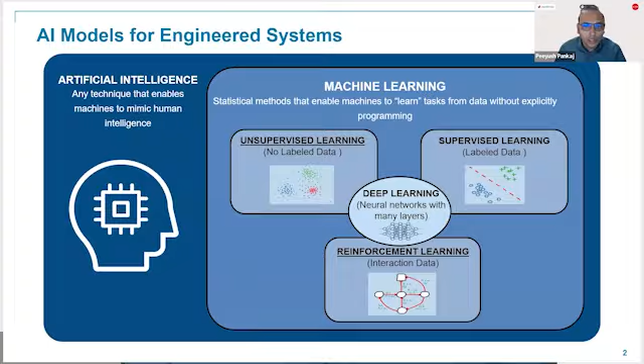So this is a general purpose AI. You could think about training different sorts of algorithms on image classification or chatbots, etc. So that is general purpose AI. Now, to your second question, Kishore, why it is gaining so much traction these days compared to maybe a decade ago. There are several reasons.

The first is nowadays we are seeing that all the heavy industrial machineries are basically attached to IoT hubs, and then basically there is a lot of data availability. There are a lot of sensors which go on to heavy machineries. So data is not a scarcity anymore these days.

Secondly, we see that there has been a lot of advancement in the semiconductor industry in terms of powering AI related chips, meaning that AI models can actually be deployed closer to the target environment itself. And also, if you talk about training these models, you have GPUs, you have HPC servers these days, so that large language models also can be trained much faster compared to traditional models as well. So that is where computational power is also an edge.

Now, at the same time, in the last decade, there have been a lot of new algorithms gaining popularity. Whether you talk about anomaly detection kind of models in the engineering sense, or semantic segmentation applications, these basically require very heavyweight AI models. And because the technology has also advanced where you can train these kind of models on your data, these three are the primary pillars of why we are seeing a lot of traction in industrial AI use cases.

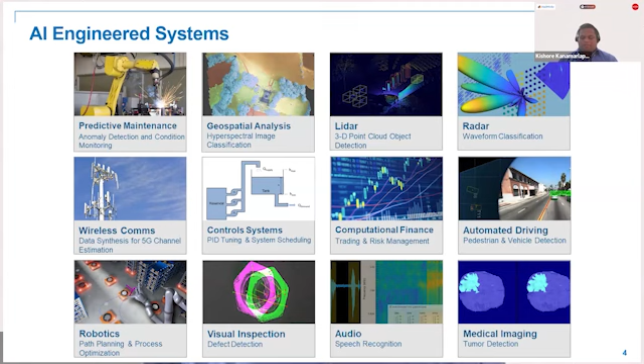Yeah, thanks, Piyush, for highlighting how the semiconductor industry has evolved over the past decade. But I want to go a little bit before in the timeline. In the late 18th century, we call it Industry 1.0, where it started with steam power and mechanization. That's the key driver. Whereas after 40, 50 years, between the late 19th century and 20th century, it is mainly shifting to electricity and also the assembly lines. That's where it resulted in the rise of mass production and standardized goods, and basically electric power started coming in. And for example, Ford also started their assembly line in the automotive industry. This is Industry 2.0.

But after that, Industry 3.0 is a little bit of a bridge, where computers started coming in the mid 20th century, and also electronics and automation started happening after Industry 2.0. When I mention automation, that's where the use of computers, PLCs like programmable logic controllers, and some IT systems came into the picture, which started the digital revolution in the factories. But now, as you said, it's more the rise of the semiconductor industry, as well as IoT and big data, which transformed Industry 3.0 to Industry 4.0.

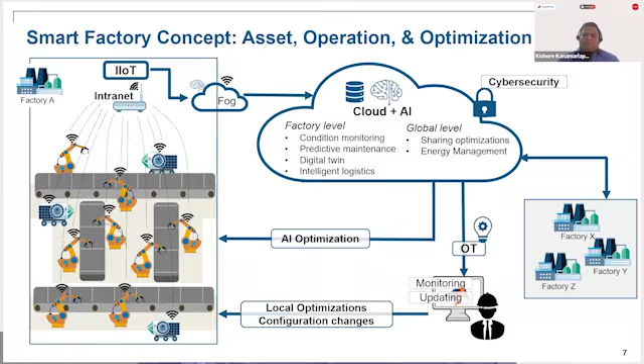So, for example, as we saw in the poll earlier, some are still exploring how AI can be deployed, right? So when we work with the customers, this slide will give you the picture of where you can start, because for each factory, each industry, it is a little bit different what kind of application suits them. So that's where we are highlighting predictive maintenance, digital twins, virtual sensors, automated visual inspection and robotics as the main use cases where they can start their smart factory journey.

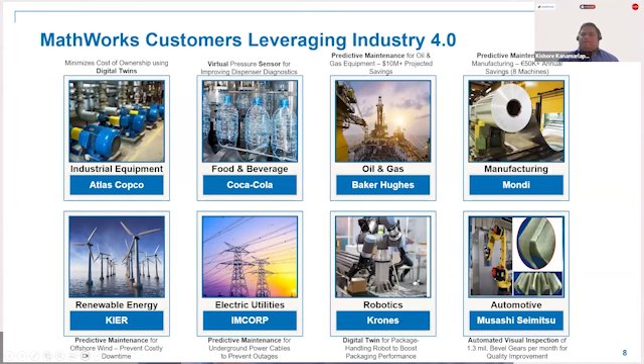And let me highlight a little bit two use cases which we have worked on with customers. For example, Mondi implemented predictive maintenance for their manufacturing process with machine learning. So when we reached out to these customers, first thing is their manufacturing line works 24/7, right? So their first question was whether your solution will run in a robust manner 24/7 or not. Then after that, whether you can reduce the waste or not, whether machine downtime can be optimized or not. Those are some of the challenges.

That's where they have used MATLAB to develop and deploy these monitoring and predictive maintenance algorithms and software. And it is able to predict the failures. With this, I think it was deployed only for 8 machines in their factory, and it resulted in about 50,000 euros per year in savings, right? If it can be scaled for other lines as well, the savings will be more. And as you know, MATLAB Simulink offers a low-code approach, by which you can reduce the development time to 6 months, and it can operate 24/7.

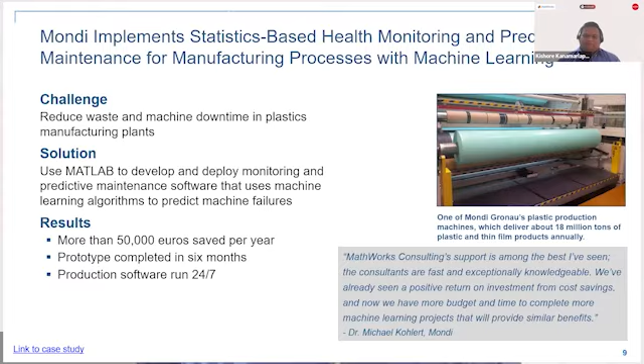And the other user story is Musashi Seimitsu, where they have used automated visual inspection. And this is where, as you mentioned, one of the deep learning techniques in AI has been used.

So their challenge was whether they can reduce the workload and cost for manually operated visual inspection for like 1.3 million automotive parts per month, which is very, very huge. And this is where Musashi Seimitsu built a camera connection setup and pre-processed the images, created a bit of custom annotation tools, and improved the model accuracy.

And as you know, MATLAB offers a wide framework to deploy the code. They have used our GPU Coder product and deployed to NVIDIA, by which they can achieve anomaly detection. And what benefits they have achieved? So as you know, these smart factories, sometimes they might not have knowledge about AI. I mean, separate departments, right? For the digital aspect. That's where we will start.

We also have that consulting arm where we work with the customers and we gather their requirements, and then we deliver their solution, and from there they can take it out. So that's where it enabled seamless development workflow from image capture to embedded GPU. And they have used CAM approach, right? Class activation mapping, to estimate and visualize the defect area part. And a simple web app can be developed using our MATLAB Simulink, by which it improved the labeling efficiency.

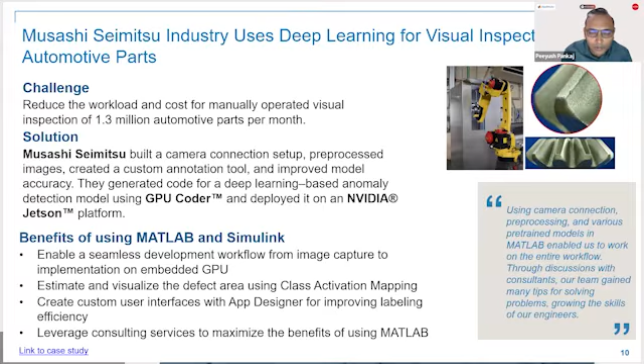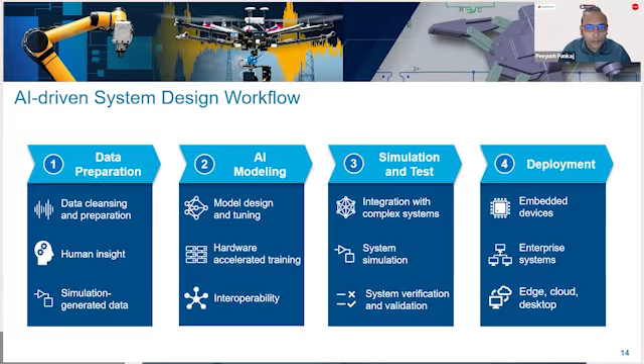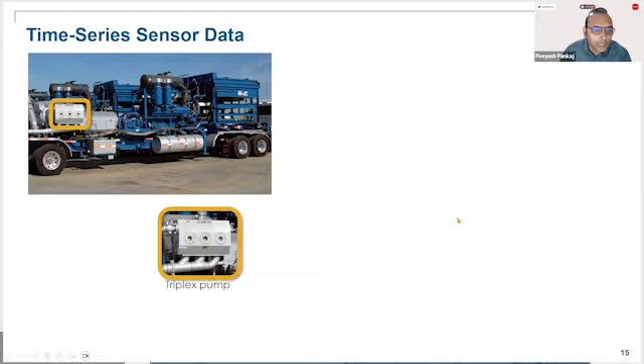Now, coming to your other question, Kishore, on what kind of data we need for this. Since you touched upon two application use cases, predictive maintenance and visual inspection, here I'm taking an example of an oil and gas rig. This is where you see a highlighted equipment called a triplex pump. You could have data collected from different sensors on this triplex pump, like temperature, flow sensor, and pressure sensor, etc. It depends upon the asset that we are monitoring.

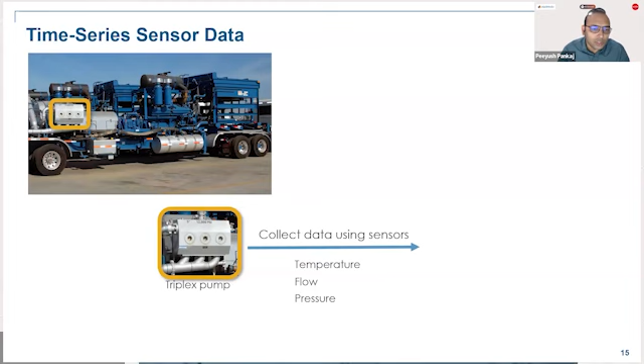So the time series data can be accumulated, and your data could come in from a healthy operating environment, as well as from when we have done some maintenance activities and knew what kind of failure happened historically. If we go back in time, we can also label the data for different kinds of failure modes.

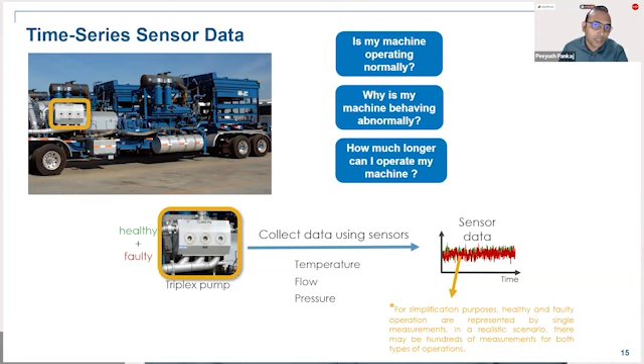Right now, when we are talking about predictive maintenance, there are three types of scenarios. The first is, we want to understand whether my asset is operating normally or abnormally. So that is typically the anomaly detection workflow for you. The second is, when you know that there is a certain anomaly, then what kind of anomaly is actually happening? What kind of failure mode is triggered?

That is condition monitoring. Then the most advanced phase is when you know that a particular failure mode has started to trigger, then how much time or how many life cycles do I have left before I hit a critical failure, right? So that is where you do remaining useful life estimation modeling as well. So this is what happens in predictive maintenance.

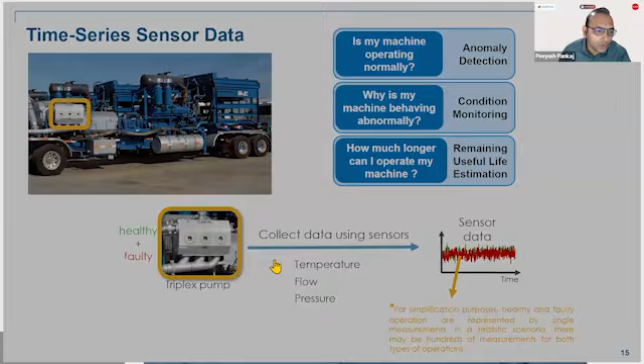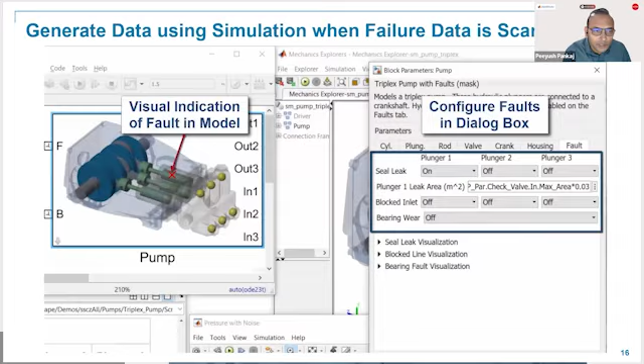Now, since we are talking about time series data over here, that is where I would like to show you a video where this is a Simulink and Simscape environment within the MathWorks toolchain. And you would see that we can create a physics-based model based on first principles modeling. And once we have the physics-based digital twin, which we have correlated with the actual data on the healthy side,

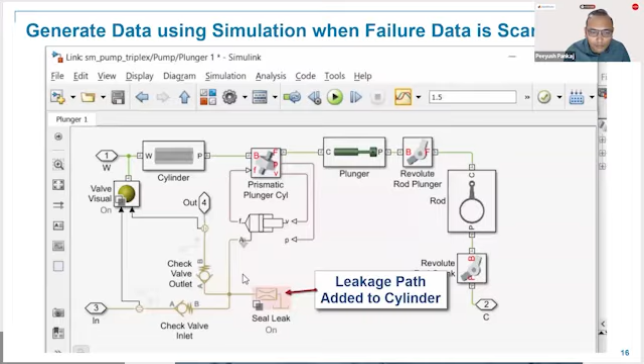you can inject different kinds of failure modes, like some valve is leaking or some cylinder is blocked, these kinds of scenarios in this context. And then you can compile the model and see whether a particular injected failure is also shown as a failure mode or not.

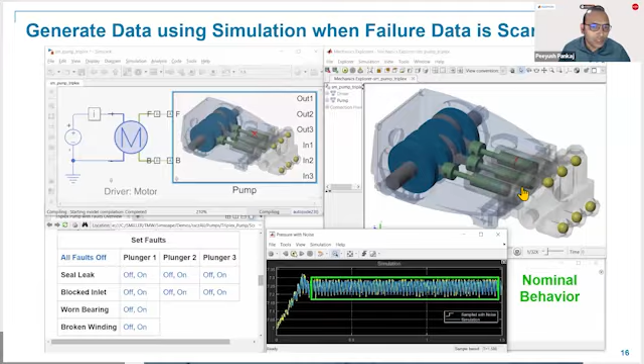Now, at the same time, this is where you see when the asset was actually operating normally, this is the green threshold region, the bounded box that you see, where the normal behavior data was actually recorded. And this data is also correlated with the healthy operational data, because after working with so many customers, we have realized that healthy operational data is the easiest to get, and that is where you can correlate your physics-based digital twin.

Now, once you have correlated your physics-based digital twin, and then you inject different types of failure modes in the model, and then you start synthetically generating the data, you would see that for different failure modes, the data will certainly not be in a normal operating range. So this is just to show you that when there is a scarcity of failure mode data, a physics-based digital twin is the approach to generate more and more synthetic data in these scenarios.

Now, the second use case that you touched upon earlier, Kishore, was visual inspection. So just to give you a thought on how to set up this entire data pipeline. First, if there is, let's say, a conveyor belt on a shop floor where you are producing a lot of different products, you can have a camera module mounted on top of it. It has to be a controlled camera environment, so it should be mounted on some fixture.

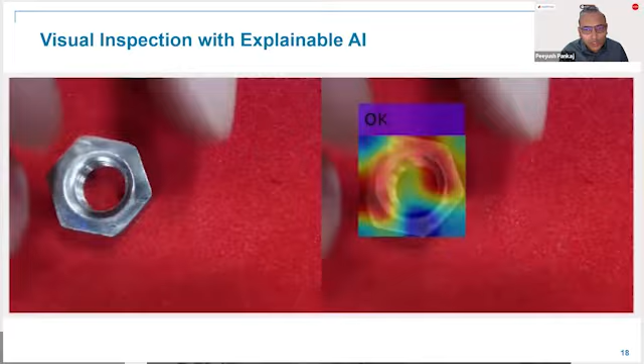And at the same time, you can also see that there is a heat map showing the pixels where the AI model is focusing, right? So when the part is not good, it is highlighting where the defect is observed. And when we place a good part back again, you will see that the heat map is more distributed, meaning that the AI model is not able to locate a fault, and that is why it is classifying the part as good. So this is more on the explainable AI side, that we can understand the behavior of these AI models through the right modeling practices as well.

Yeah, that's about it, Kishore.

So one more thing is when you are working with these customers, you will come across situations where they might be using Python. And in your 4-step workflow, how can it be integrated, and whether MATLAB and Python can work complement each other, and how does MATLAB accelerate the adoption of industry AI from design to deployment if someone is already using Python?

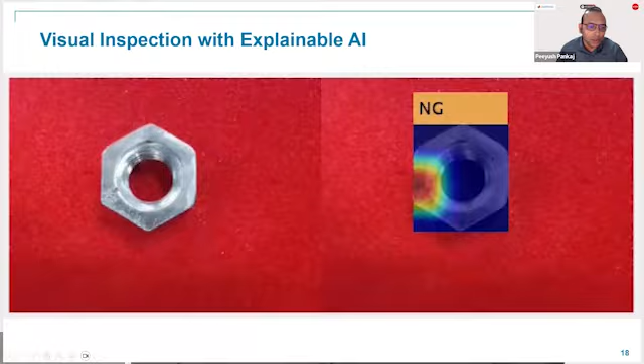I would like to take your second question first, how MATLAB can accelerate this whole journey. First of all, MATLAB is a low code environment. We understood, while working with different industries and engineering teams across the globe, where the pain points are. For example, one pain point could be preparing the data for AI modeling, and a lot of surveys have been done by Gartner, Forbes and other magazines showing that 80% of an engineering team's time actually goes into data preparation itself. That's where we have automated and interactive applications in MATLAB, so an engineering team doesn't have to write a lot of code.

They can do things interactively. I will also showcase some examples in a few minutes. But then, when it comes to testing the performance of your models in a larger system, that's where we have a mix of both physics-based modeling and data-driven modeling, such that you can really test your algorithm in a production-scale scenario before taking it for deployment.

And lastly, as I spoke earlier in the four-bucket workflow, your code generation capabilities are also automated with the MATLAB toolchain. While you are programming in MATLAB or building solutions in MATLAB, when you want to take it to production, you need the right code generated—it could be C++ code for target-agnostic deployment, or target-specific code generation like CUDA code or PLC code. In those cases, MATLAB also has workflows to do auto code generation without you explicitly writing any line of code.

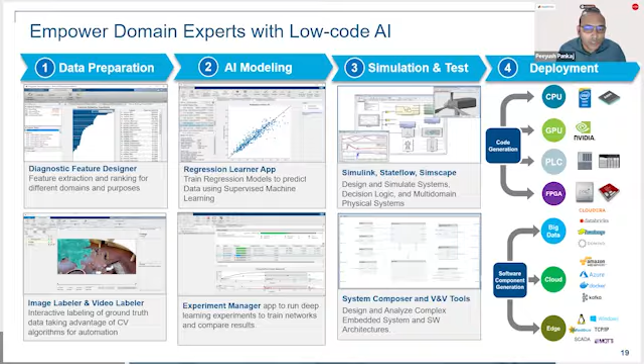And we are also very tightly integrated with a lot of cloud providers, and we have the right practices in place such that your solutions can be taken to a cloud-based environment as well as a desktop-based environment. So with that context, let me show you some examples of how these apps look.

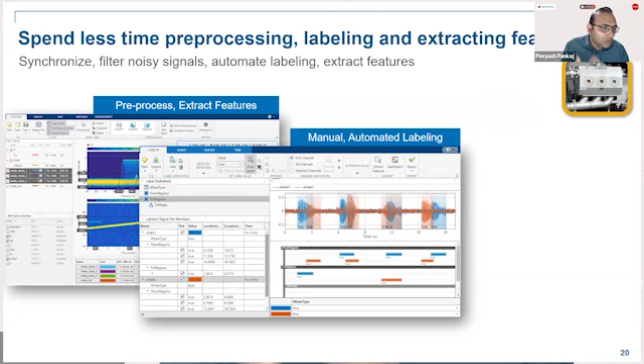This is an example of a signal analyzer app where you can bring in time series data, do frequency domain analysis, time-frequency domain analysis, and then automatically label this data using something like the signal labeler application.

Now, the animation you just saw playing is a diagnostic feature designer app. Let's say we import time series data—then you can compute 80 different features. It really breaks down the behavioral aspects of the signal itself, where you can extract time domain features like median, mean, kurtosis, crest factor, etc. over a rolling window. At the same time, in the frequency domain, you can compute features like fundamental frequencies, corresponding amplitudes, band power of the signal, etc.

We've also added a lot of features on the rotating machinery side in this app. And then you can rank these newly generated features, which were not part of your original data, within this app, because you don't want to take hundreds of features for AI modeling—you want the features that are really impacting your analysis at the end of the day. So that's where you can rank these features using this app.

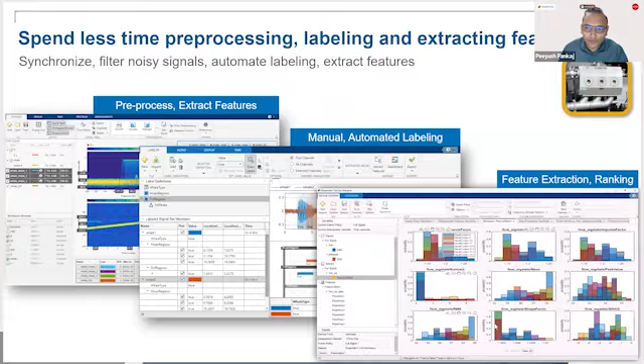Now, this was on the time series modeling side. On the images and videos part, we have an image labeler application and a ground truth labeler application, where you can interactively label the data, as you'd see in some of the animations on the left-hand side. At the same time, MATLAB's image processing and computer vision module helps you generate some interactive code as well through another set of applications. Once you've generated the image processing code, the same code can be automated to label the data much faster, without you manually labeling image by image.

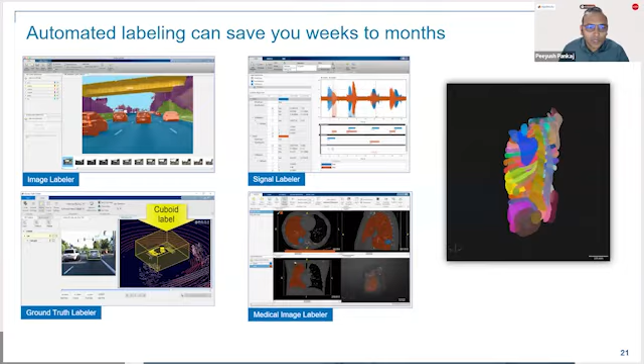So what I'm trying to say is it really enhances your productivity when you're trying to prepare your data in the MATLAB toolchain, compared to the work you might be doing in Python or any other third-party tool. So here is a quick example, again, of a semiconductor example that I'm taking here.

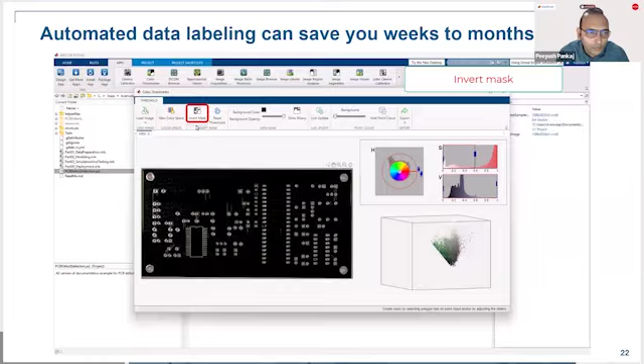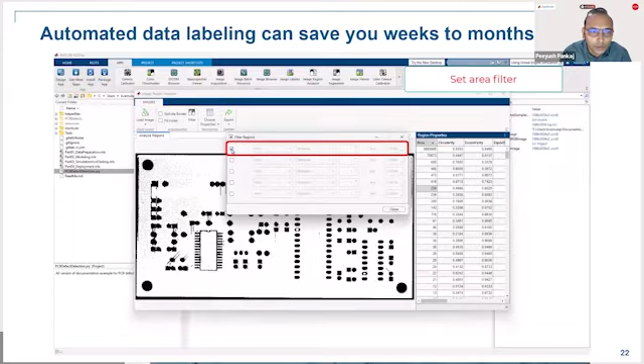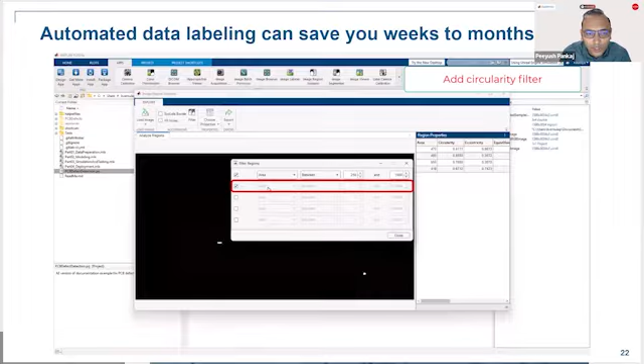So here what I'm showing you is a color thresholder application where, if you are denoising the image, you are creating a mask out of it to understand which are the poor quality portions where some holes are missing or some holes are there in the printed circuit board. So we are doing all of this operation interactively. You could see that once the mask is generated, you are able to highlight different areas of interest in our image, and we can also select only the regions which are more circular in this case, and also generate a MATLAB based function out of it.

So at the same time, I'd like to highlight that MATLAB is an interactive tool, and at the same time you can generate the code which is being used by these apps behind the scenes. So it's a complete white box operation which helps you accelerate your development time, but at the same time it's also doing the complete knowledge transfer on how things are built at the back end, right?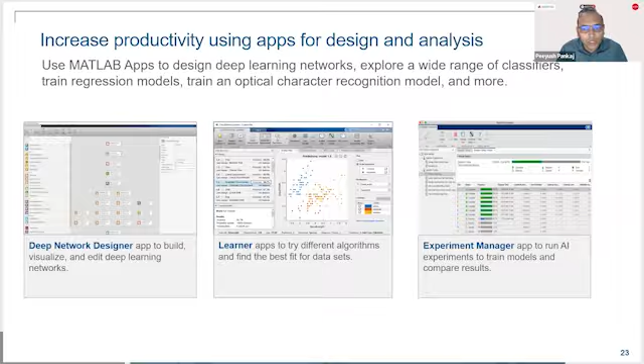Yeah, so also on the AI modeling side, again there are a lot of applications. We also have features like automated machine learning, etc. in MATLAB. And we also have an Experiment Manager app, which lets you manage different experiments between training different machine learning models and fine-tune different machine learning and deep learning models as well.

Now this is a very quick example I'd like to show you, where I am loading a feature set in MATLAB in an app called Classification Learner. And here you can select which is your system response, what kind of data you want to hold out for testing the performance of the model later, and what kind of data you want to expose for model training. And then once you have imported the data, you can also select between different number of models over here.

You can see, at one click, I can import almost 30 different models and start training these machine learning models in parallel, depending upon how many cores you have available with you. So parallel computing is also there, meaning parallel model training is enabled.

Now, like I said earlier, this app can also generate the complete source code which was basically used to train these models at the back end.

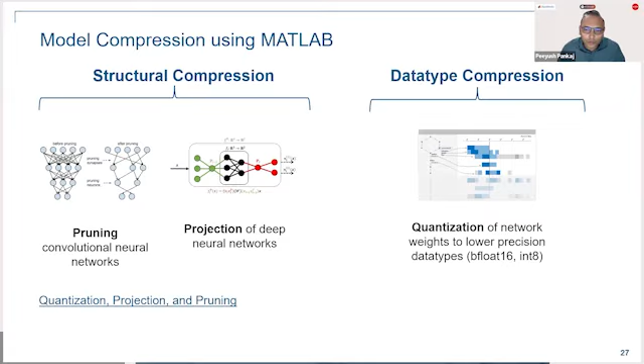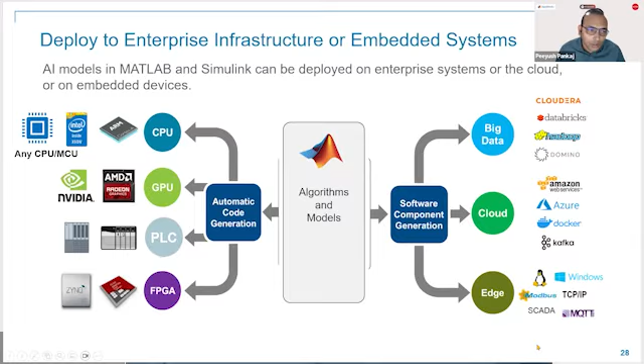At the same time, if you want to package just the analytics and host it on your own on-premise server, or maybe use something in the AWS or Azure kind of environment, we have the right protocols using which you can package your algorithm and deploy it on a server running 24/7. You can create microservices, Docker container images, all these things. You can integrate your code to read from different kinds of databases within the cloud infrastructure itself. So this is kind of end-to-end deployment where we have tight integration with different vendors on the embedded side as well as on the cloud providers.

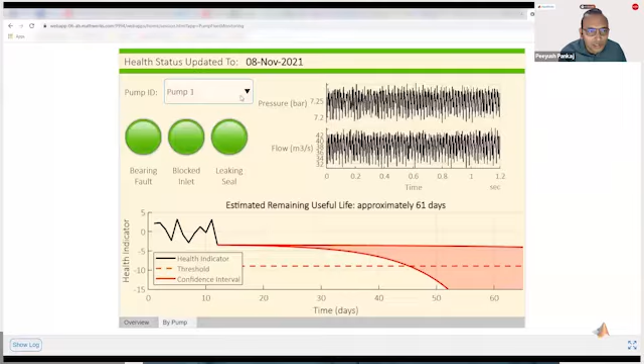Now, this is a quick example of the pump example I was taking for predictive maintenance. This is a dashboard deployed as a web application. Here you can see, among 10 different pumps, which ones are needing attention, when was the last service due, at an operational level. You can also drill down into each selective pump and see if it is seeing any kind of failure, what are the raw sensor analytics at a periodic rate, and what is the remaining useful life. If something is failing, then which particular module is failing.

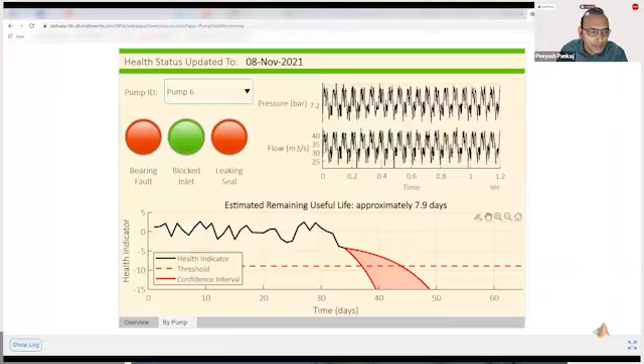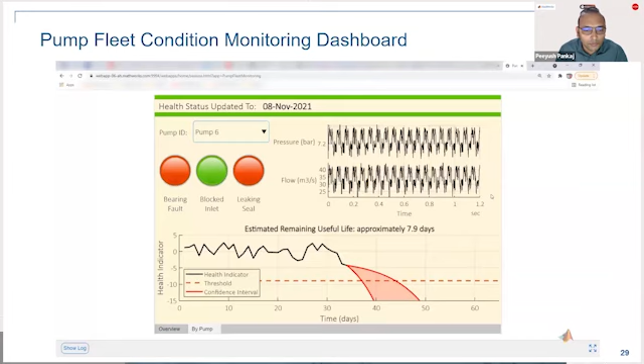And this was done for one of our customer use cases. This is real world data on which we built this kind of dashboard. So this is just showing a glimpse that this entire dashboard was also built in MATLAB. The backend deep learning model, which is also predicting different types of failure modes and all these things, is also trained in MATLAB, and the deployment is also on the MATLAB based web app server for on-premise deployment.

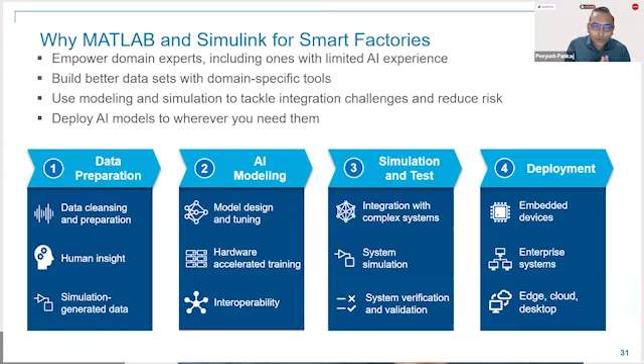Now, your other question was how can somebody get started in this particular space. So first of all, just to recap as a summary, MATLAB as a tool chain gives you a head start in accelerating the whole development cycle. I see it as this 4-bucket workflow where I also showed different interactive and automated applications using which you can accelerate

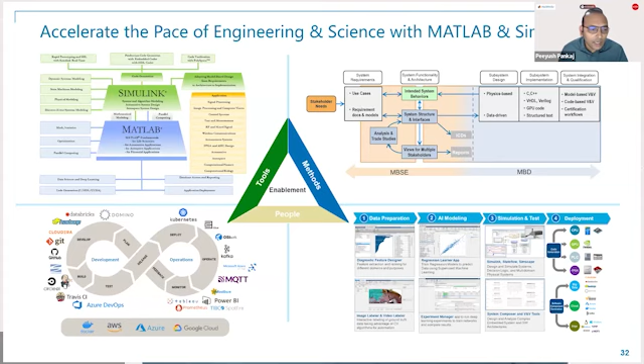this journey. Now, to start with, we have resources, training modules and reference materials, not only in the AI space, but we have a good set of materials for you to go through, whether it is model-based design, model-based system engineering kind of workflows, or if you would like to integrate your solutions in a continuous integration, continuous deployment framework, CI/CD framework, or you want to build something around DevOps, we have all the reference materials and training courses also through MathWorks, which can seriously help you upskill your game.